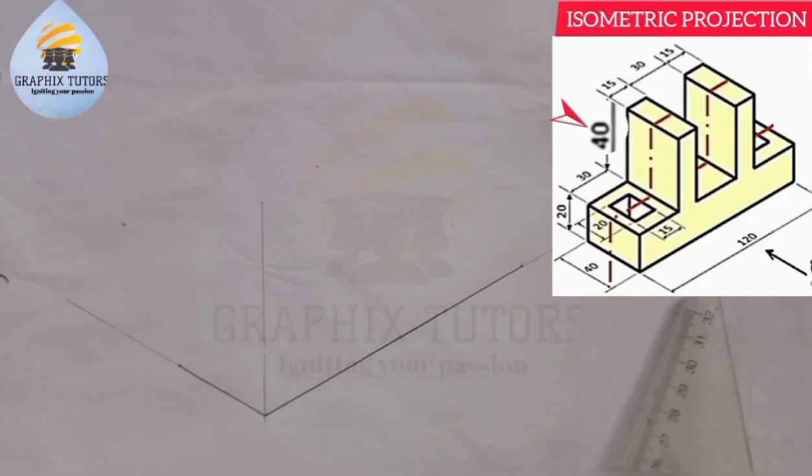In this video, we want to construct the figure displayed on the right hand side of the screen in isometric projection. When you hear the word isometric projection, the first thing you should do is draw your isometric axis, which is the vertical,

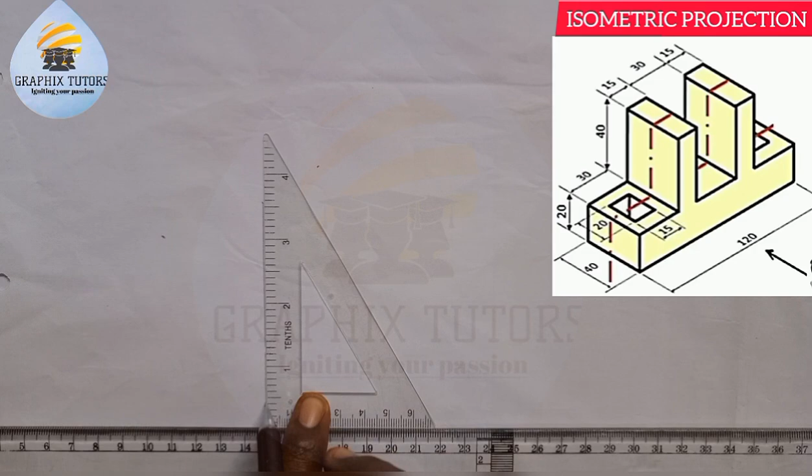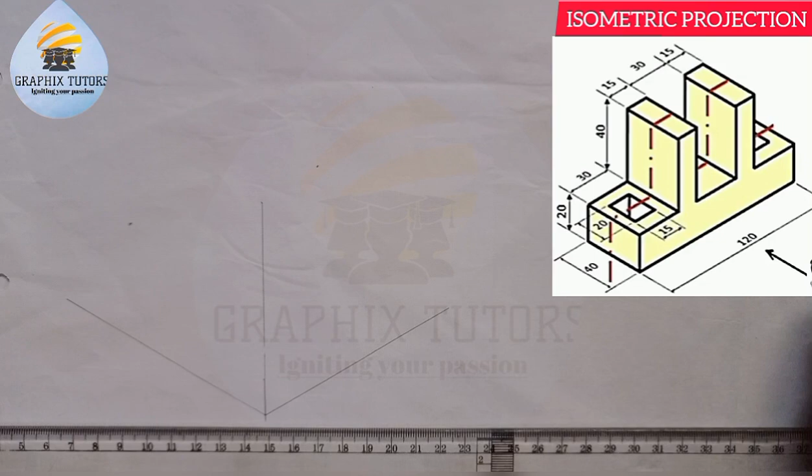the horizontal, the x, and the y. You can see that. Let me extend this more.

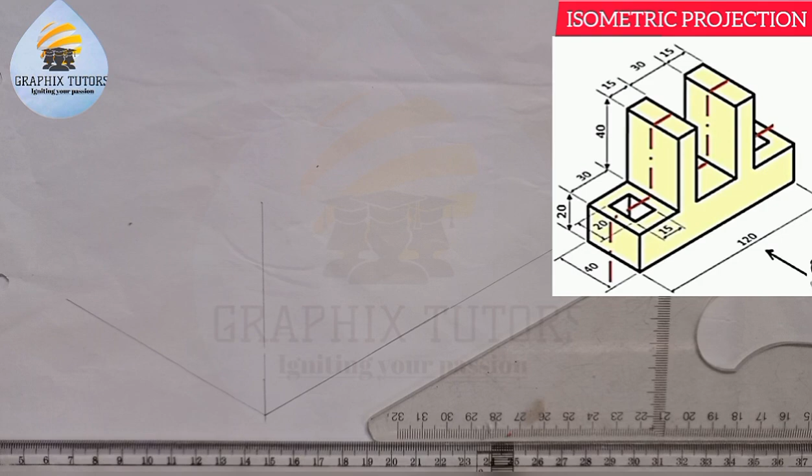Now we are told that the total length here, from here to here, is 40. So I'm going to measure 40 and I'll thicken it instantly just to save time, because from that point it is thickened.

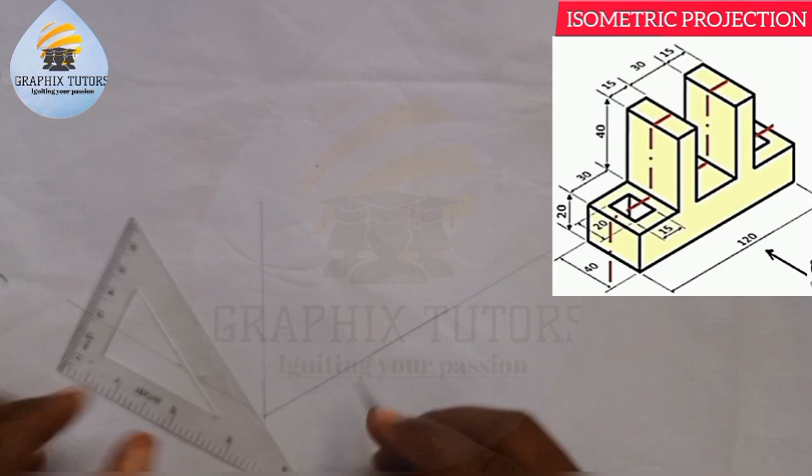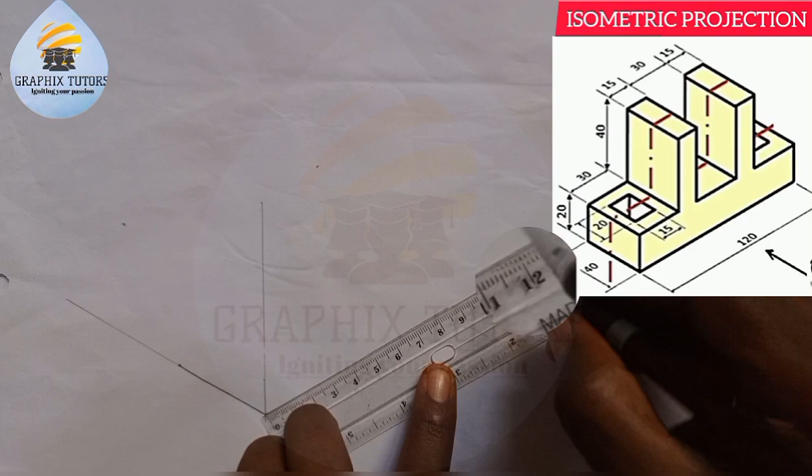Now the next one is from here to here, which is 120, from here to somewhere around here. So I'm going to measure the 120 and thicken it instantly. I'm going to use this to thicken it.

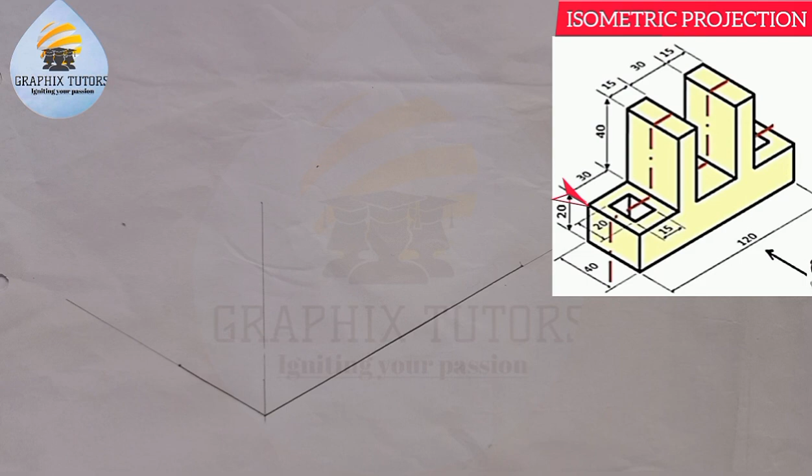Now the next one is total height, given from here to here. From here to here is 20, plus from here to here is 40, which is 60. So I'm going to measure the total height to be 60. 0 to 6 is 60.

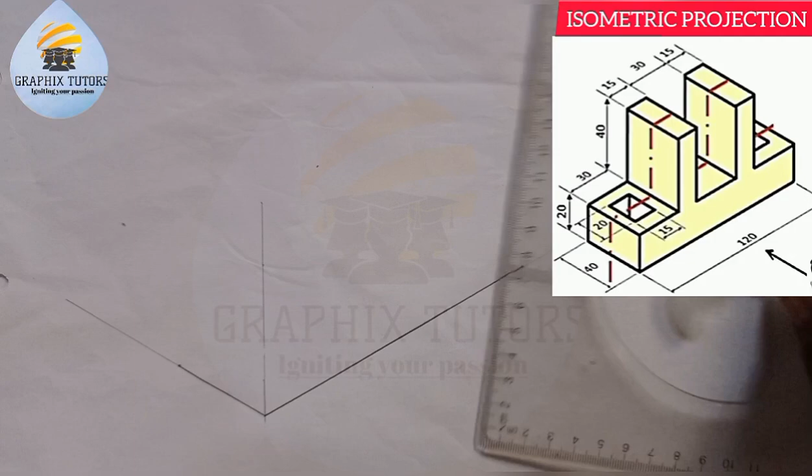So now what I'll do is take all these points up with my faint line. I'll form my box.

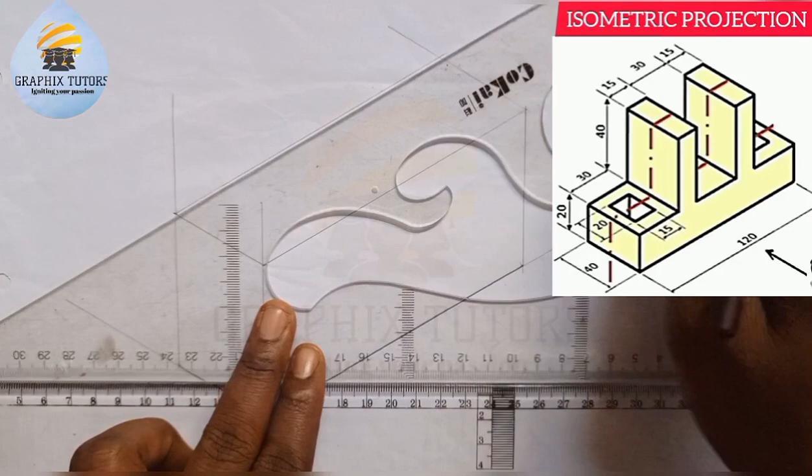So this is what we have. I brought out the box. The reason I thickened from here is because in the question, from here to here is thickened. Similarly with this side too.

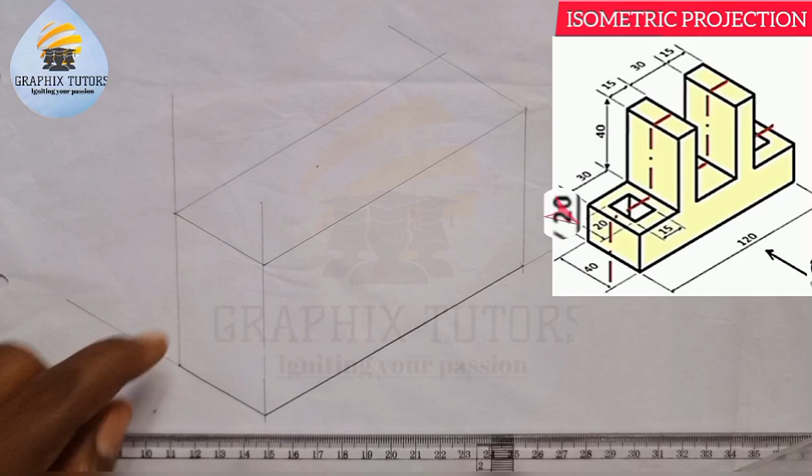Now if you look at this, the height from here to here is given to be 20. So we'll measure the height from here to around here, which is 20, 0 to 2. And what I can see, it is thickened, so I'm going to thicken it.

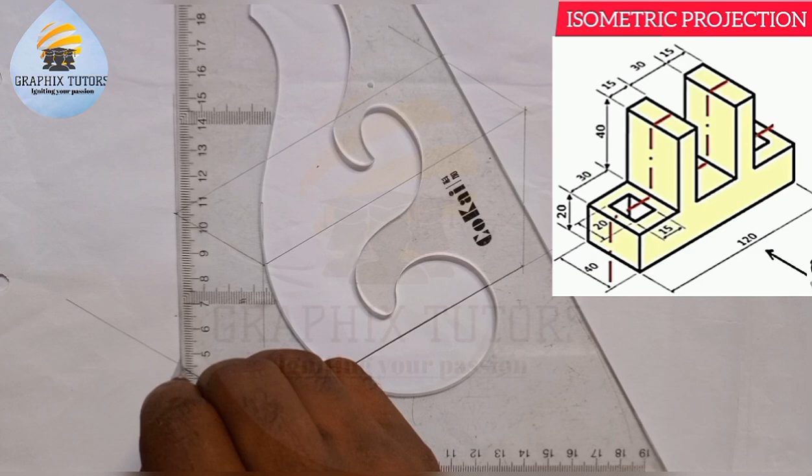And if you look at it, it's extended from this point to this point, which is this point to somewhere around here, and I'm going to extend it. Just put it here, depending on how you want to join it.

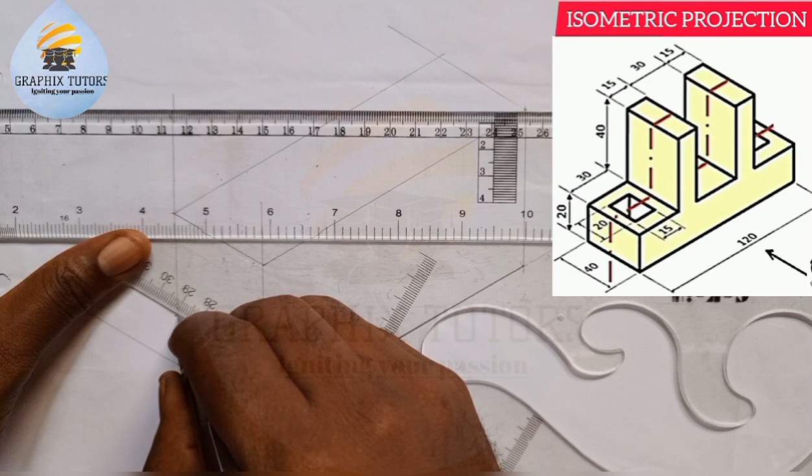You can see that. And from here to here, which is from here to here, is also thickened. So you just join it.

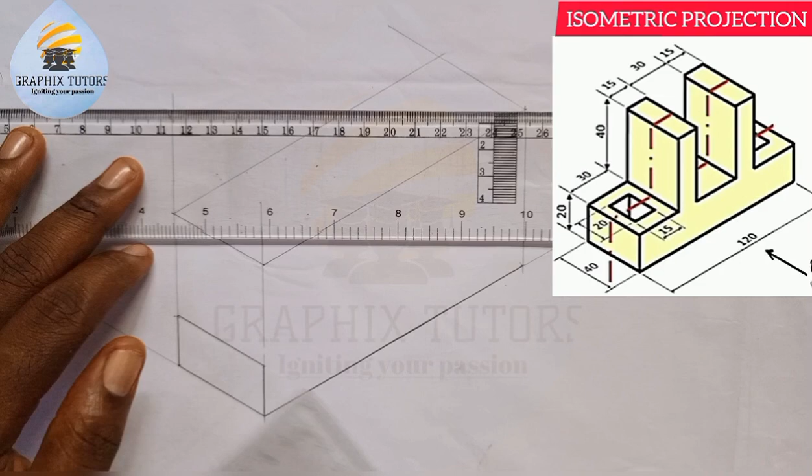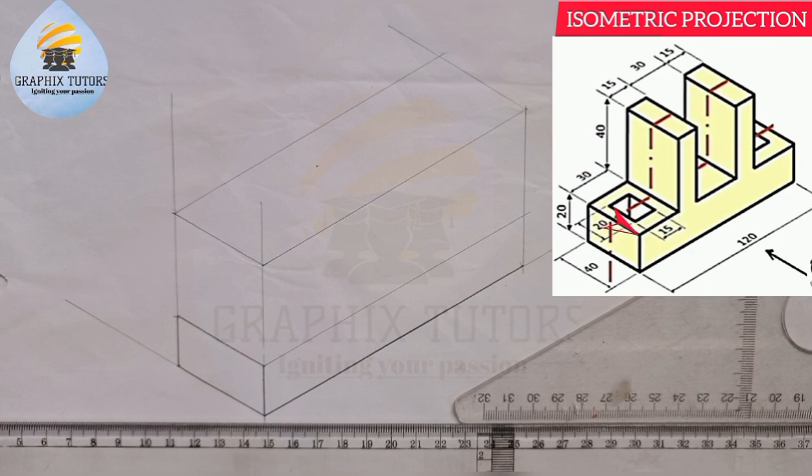You can see that. Then I'm going to move this from this point, draw a line to this point. I didn't thicken it because from here to here is not thickened. So what I'm going to do is from here to here equals from here to here, which is 30.

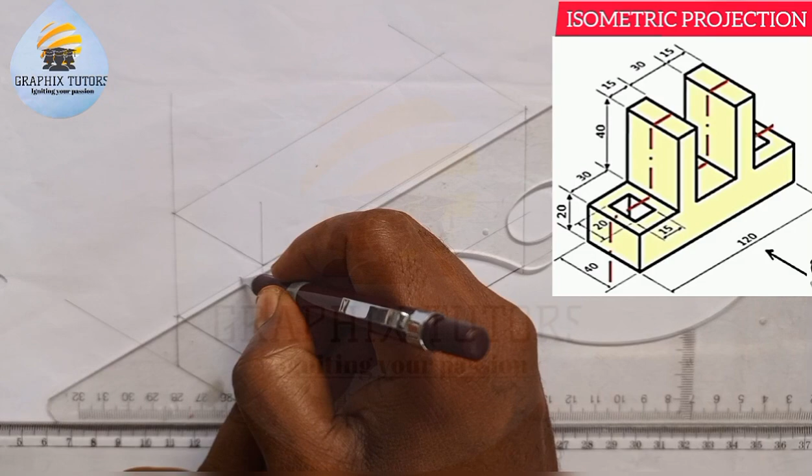So I'm going to draw another line here, and I'll measure 30, 0 to 30, and I'll thicken it straight up because it's thickened in the question. Then here also,

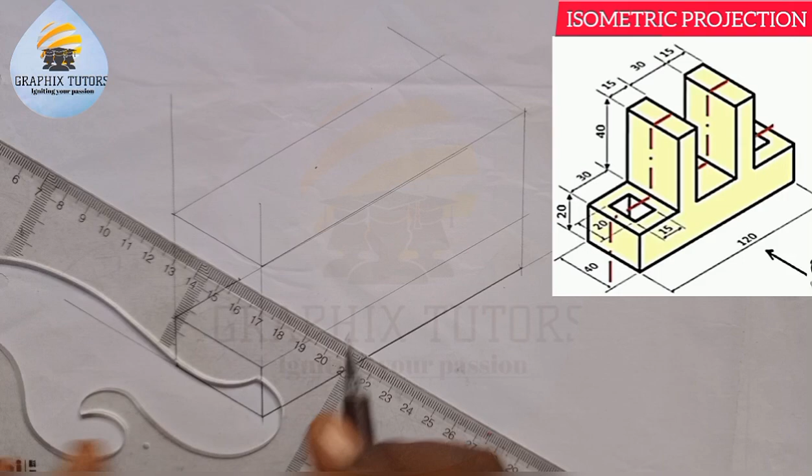I'm going to close it up here. Don't forget this is placed on my t-square, so I'm going to close it up straight up, and close it up too as shown in the diagram.

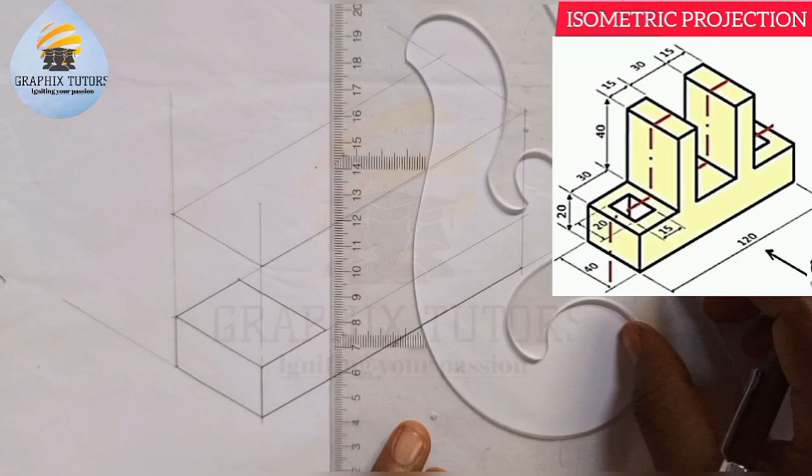Then the rest is going up. Since we know the entire height is 60, that means from here to here is 20, then the rest is 40. I'll take this up from here, straight down up to this point.

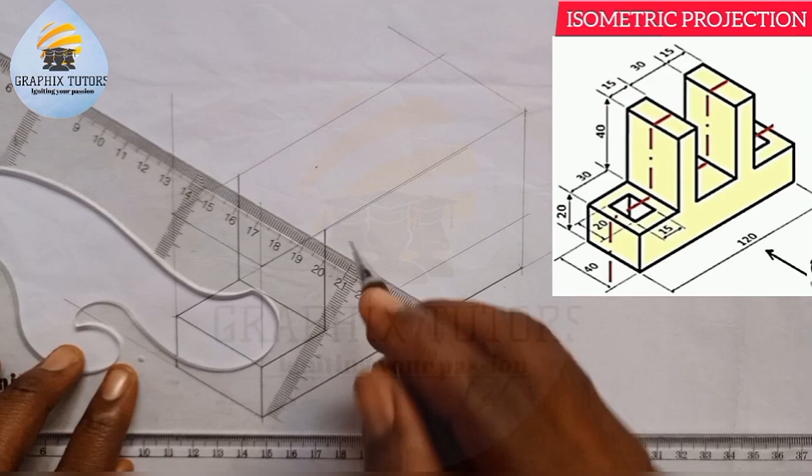From here also, straight down up to this point, and I'm going to join them. I'll thicken it since it's thickened in the question. So I'll just thicken it.

You can see that? I was given that from here to here is 15. So I'll measure 15 again from this point to here is 15.

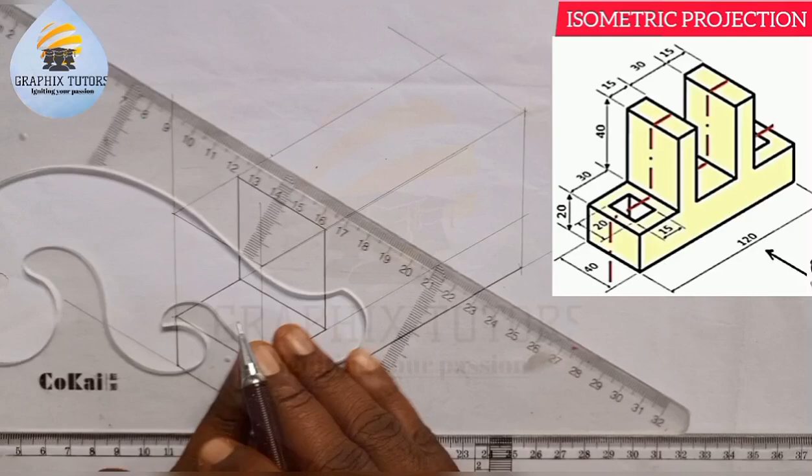Now I'm going to thicken it because from this point to this point is from here to this point here. And I'll thicken here straight up, and also here too.

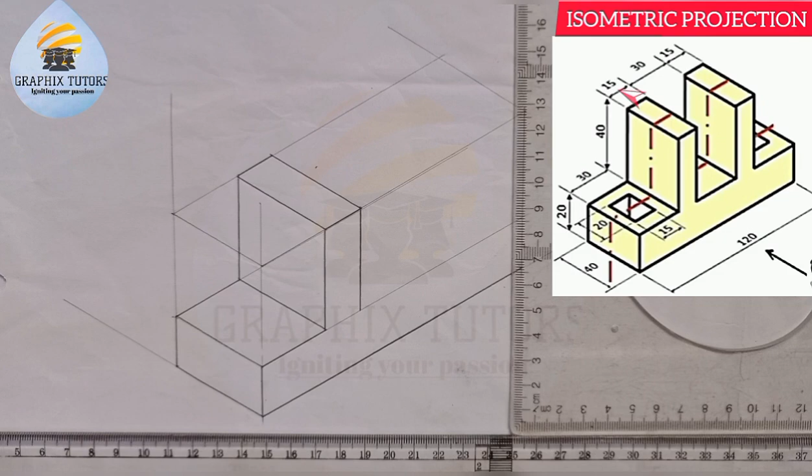Then I'll bring this down to the same level from here to here. And we are told that from here to here is 30, so I'm going to measure another 30 from this point. From 0 to 30 is here.

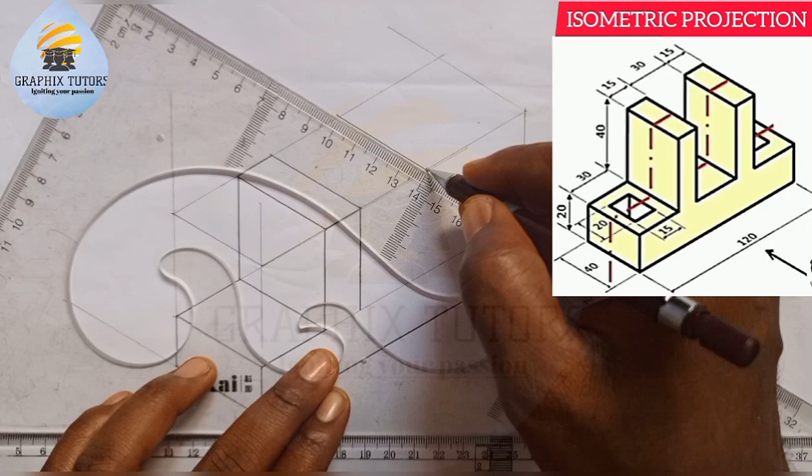I'll draw a line from here straight down here, and I'll bring it down here. Then I'll close it up as shown in the diagram.

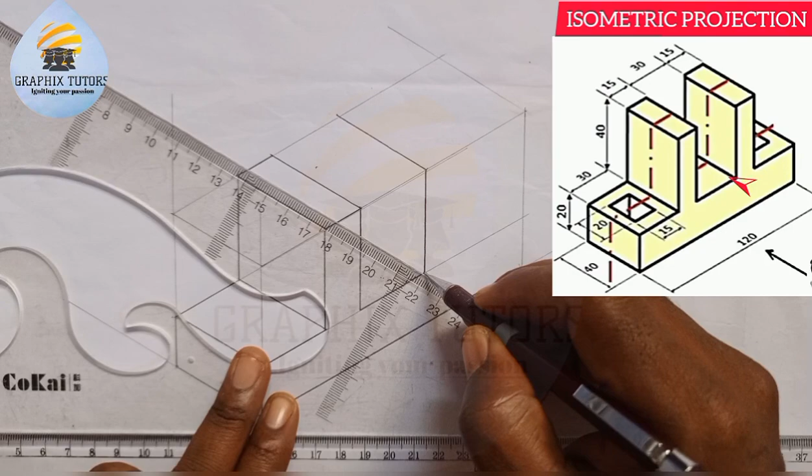And I can just bring this in this way as shown in the diagram too. Just come here to touch this, and I'll bring it down this way. We're just replicating what we're seeing in the diagram.

You see that? Then from here to here is from here to here, which is 15. So I'll measure 15 from here, 0 to 15.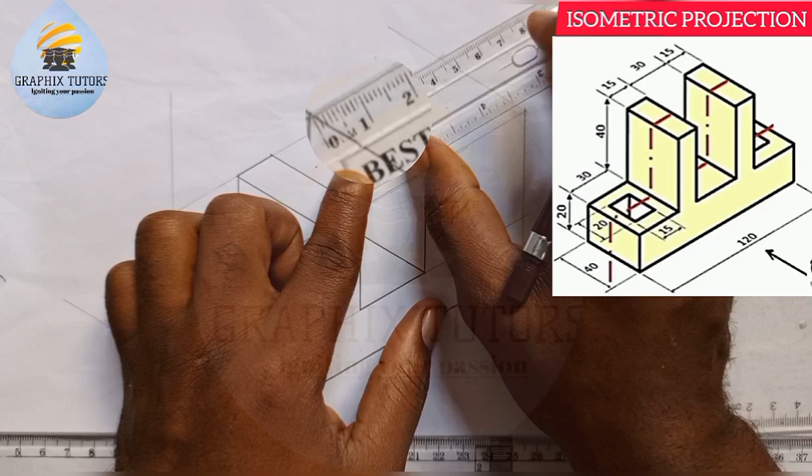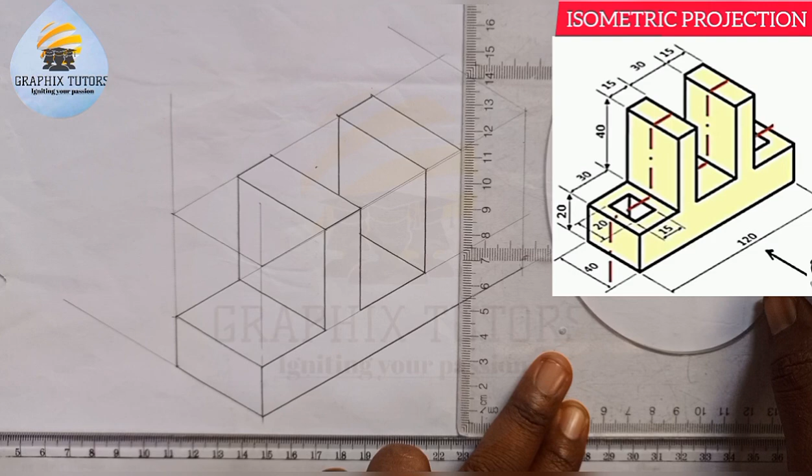And I'm going to thicken it. I'm closing here too, I'll close it up, and I'll bring it down, just replicating what is shown on the diagram here.

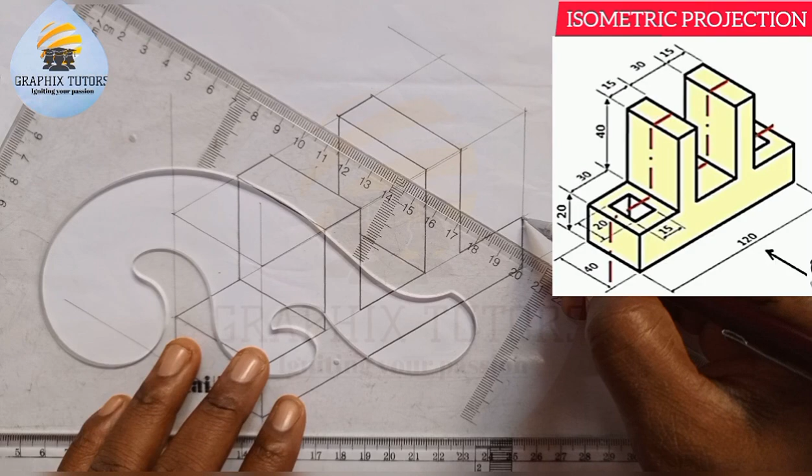And I'll close it up. Then here also, close it up as shown in the diagram, touching here.

Now it doesn't end there. Here also is closed up.

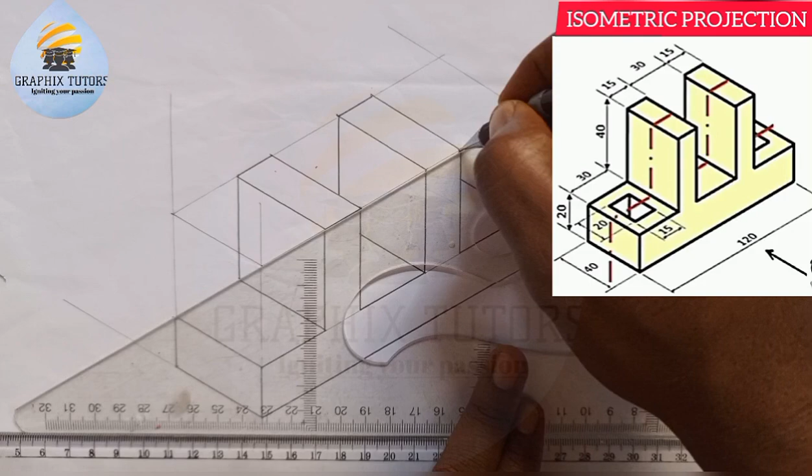What's remaining is there's a shape here. For you to draw any shape that is centralized, what you have to do first is get the center of the figure. The center here is given to be 20 because the entire length is 40. So I'm going to measure 20, and this is 20 here.

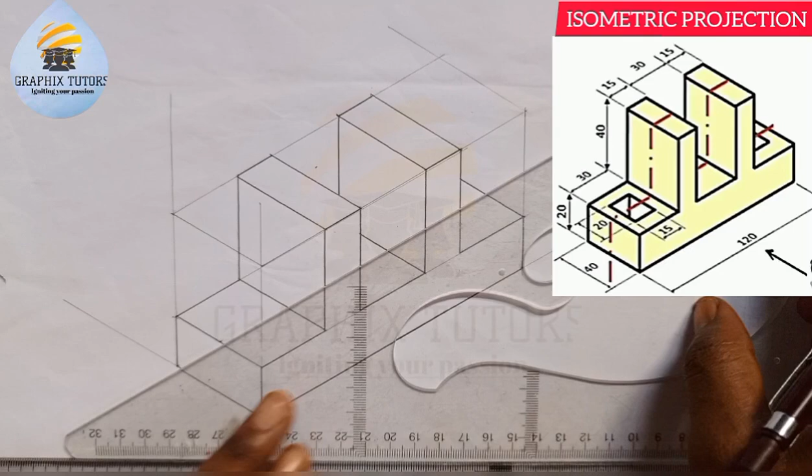I'll just draw my vertical line. Or better still, to get the center, just draw a diagonal from here to here, and also draw a diagonal from here to here. If you draw a diagonal of a plane figure, you're going to be having the center of that plane figure.

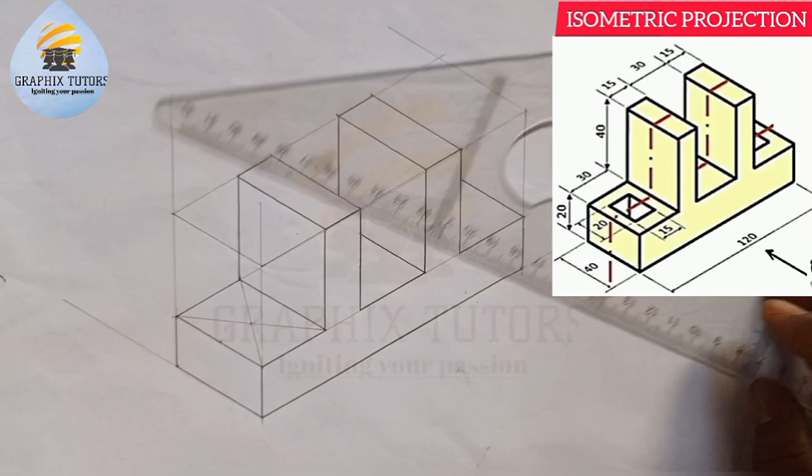So this is the center here. That's how you get the center of a plane figure. From here, you can easily just draw this, and also I'll draw this through the center. So what I actually need is the vertical and the horizontal here.

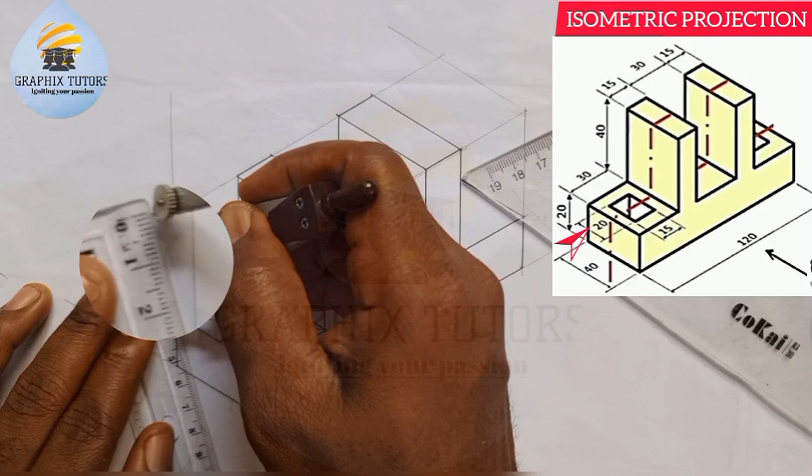Now we are told that the height is 15, the length is 20. So to get the length, I'm going to measure half of 20, which is 10. I'll place it here from 0 to 10, half of 20, at the center here. If I mark 10 here, I'm going to mark 10 at the other side. Then the other one, the height from here to here is 15.

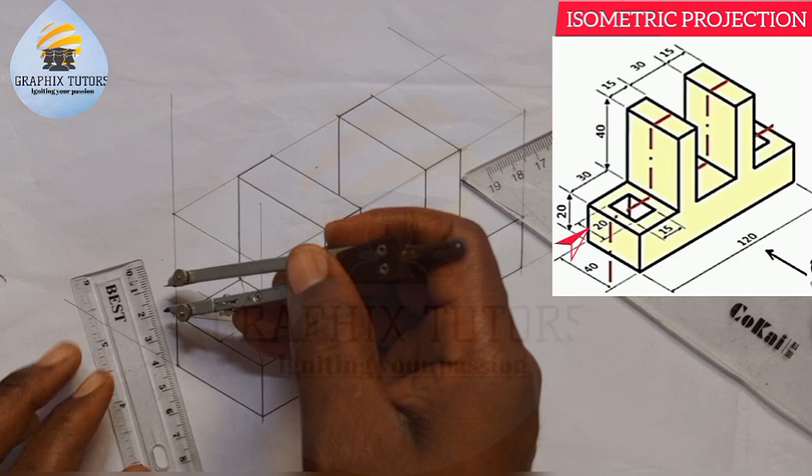So I'll measure half of it, which is 7.5. I'll place it at the center here. I'm going to mark up and I'll mark down.

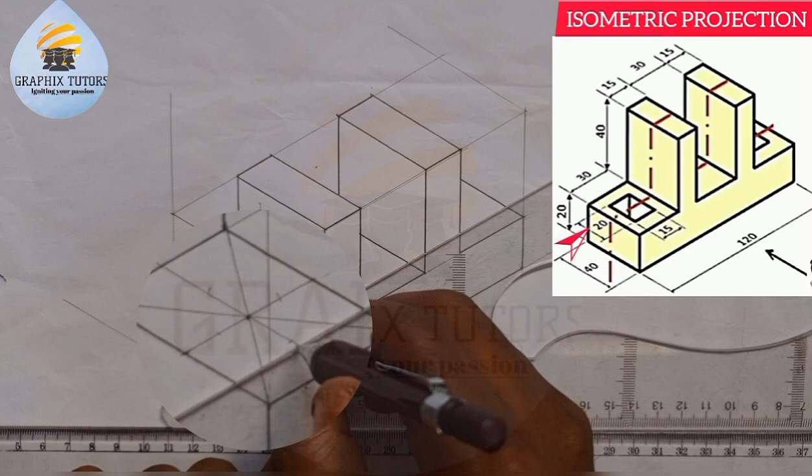So I'll now take my set square and draw a line passing through those points. Through this point, I'll draw a vertical line. Through this point also, I'll draw another vertical line. Then I'll close them up so that it will form my rectangle.

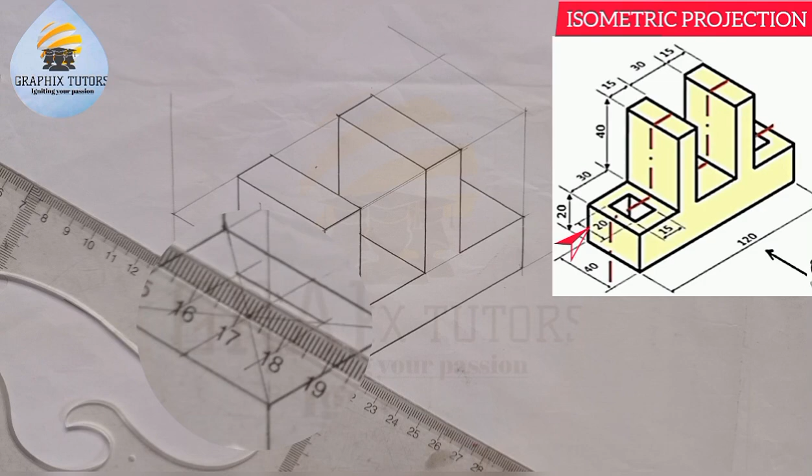From this point, passing through this point, I'll take in this since I know it's ending. Then I'll come here also, and do the same thing through this point. I'll take in it and close it up, from here and from here.

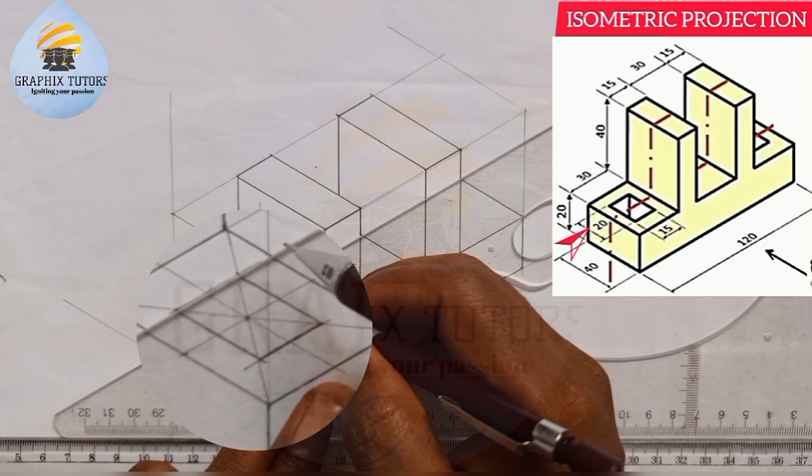I can virtually just take this down because it should be a true line. So I'll just take this down this way.

This is a symmetrical object. What I mean by symmetrical is when you divide it into two, what is at the left hand side is equal to what is at the right hand side. And also when you divide it in this manner, what you see at this side is equal to what you see at this side.

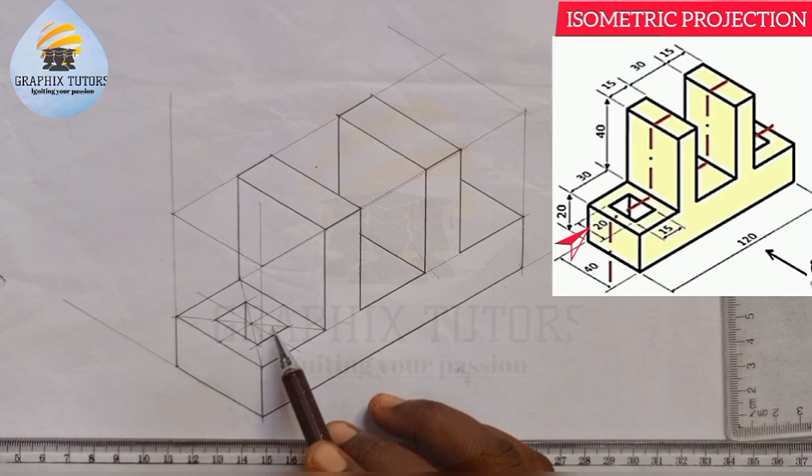So I'm going to do the same thing here. I don't have to disturb myself, I'll just transfer my point from here and draw a line this way.

Similarly from here, I'll draw another line here, but it's not that obvious. I'll just get the center line on this point. You just replicate the same thing here.

I don't want to just stress myself, so I'll just transfer the point from here to here, from here to somewhere around here. So that's the center. What I'll just do is measure the height from here to here.

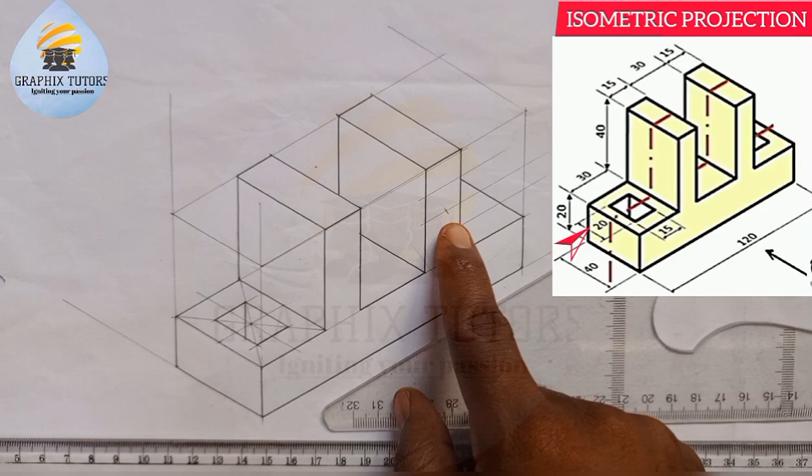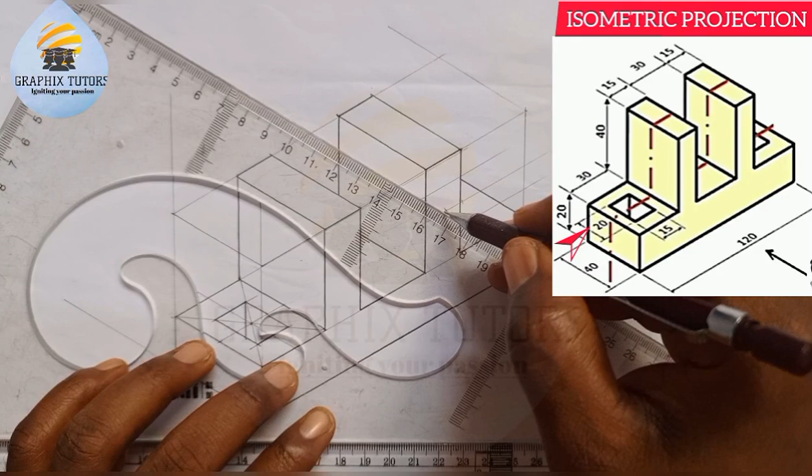I'll place it here, and I'm having this. And the length, I also need the length too. So I draw my line here. It's just replicating the same thing, so I just want it to be faster. I'll just draw the same thing here.

So the length, I measure from here to here. I'll place it here, and I'll be having this. This way is actually ending. So I'll just do this from this point.

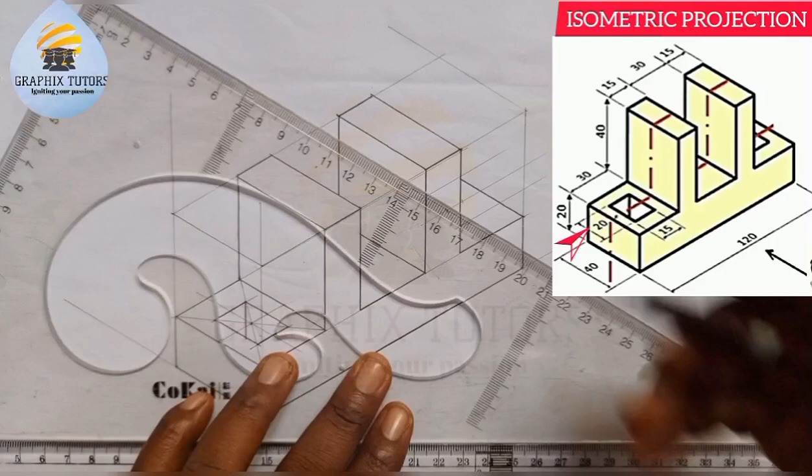I'll draw a line. Then from this point, draw that line. So that is what we have there. We have replicated the diagram that is displayed at the right hand side of the screen in isometric projection.

So if you found this video helpful, what's also important again here is for you to do your dimensioning. Your dimension is very important, just like as you see in the figure. Ensure that those dimension lines are not touching the main figure.

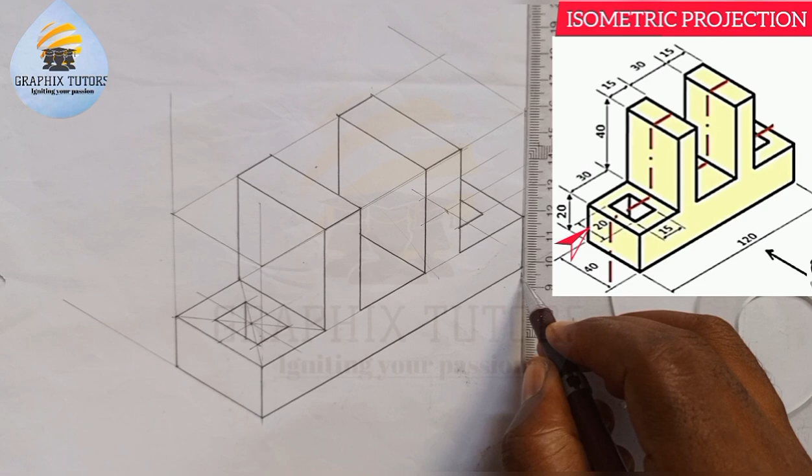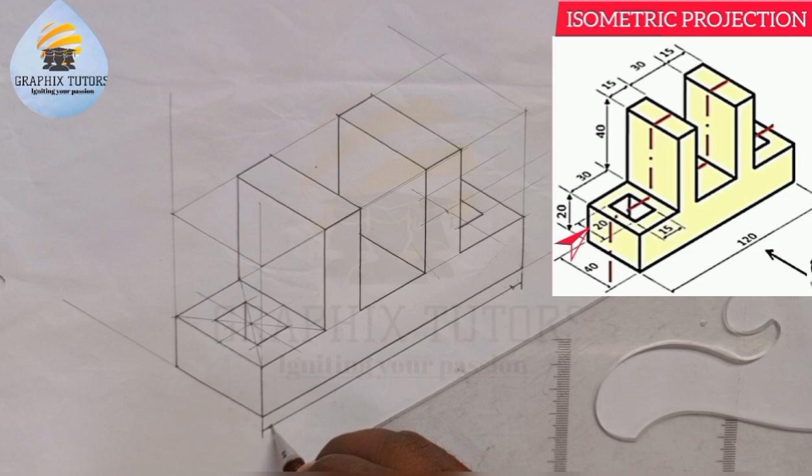What I mean is, let me just give you an instance. From here to here, and here to here, this is 120. So we know that is 120. Taken from here to here, and here to here, going to be 120. So that's what we just have there.